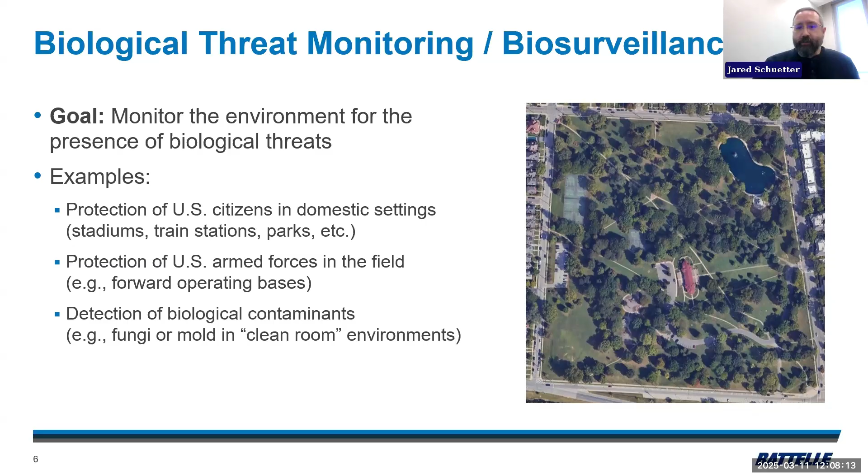And so, you may want to be putting some devices in a clean room to monitor to make sure there aren't any mold spores or fungal spores floating around, or in a water supply, say. So just using this park as an example, the idea is you're going to place some sensing devices of some sort throughout that environment. And, ideally, these would be passive sensors.

So any kind of particles floating around the air, when they come into contact with one of these devices, the device will in some way try to detect and maybe identify what that particle is. And then by tracking that information over time, or by using the results of an identification algorithm, you can figure out whether there are any anomalies. Is there a biological material in that environment that shouldn't be there, or are the levels of biological particles going higher or lower than you would expect, which might be indicative of some kind of an event?

And so if something is detected, then you would send an alert to some kind of end users, maybe first responders, or some kind of dispatch, to try to get somebody to look at the situation. So, in this picture on the right, maybe there's some kind of plume of biological material here. Hopefully you can see my mouse. Some kind of plume of biological material that's emitted from around the center here and flowing to the southwest. And maybe two of these sensors detect particles that are anomalous, that are associated with that plume. This would be an alert that would be sent to someone to say, hey, there's something happening here.

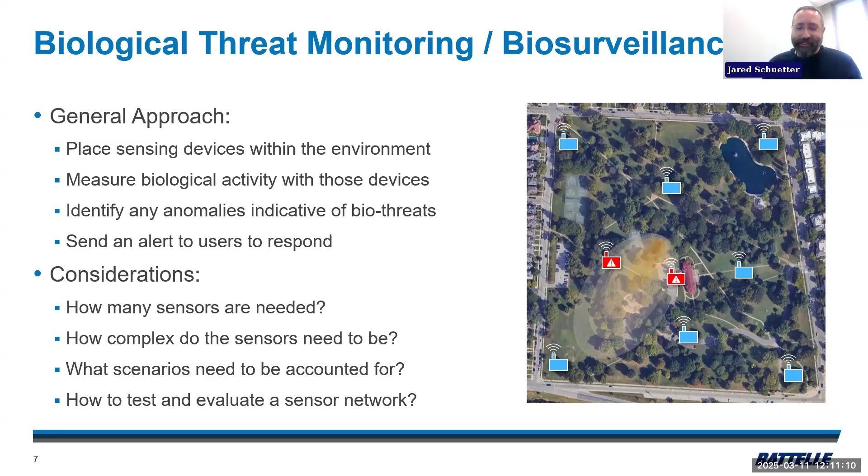Okay, so the area Battelle's been doing a lot of research in for a decade and a half at this point is in the design. Well, in part, what we do is we've tried to build our own sensor solution for these types of problems, and that's the REBS, which is here under Raman spectroscopy. There you go. But there are some other options out there.

So just to give you a quick overview of the sorts of sensors that people have developed, a lot of the sensors that are used in this field are the light-induced fluorescence sensors on the left. These tend to be really low-cost sensors, so you can put a lot of them out in the environment. They're lightweight and easy to use. The drawback to these types of instruments is that typically they're just detection based. So they're just looking at the fluorescence of these particles in different bands of light to try to identify whether they're biological, and then counting them.

And so all you'll get from these devices is you'll be able to see whether there's an increase in the volume of biological particles, the concentration of those particles over time. But you're not necessarily going to be able to identify what those particles are. And you can imagine in springtime, you're going to see an influx of biological particles just because you're going to have pollens and other things being released from all the plants that are growing. And if you're not accounting for that, you could have a lot of false alarms from systems like these. But anyway, those are used a lot.

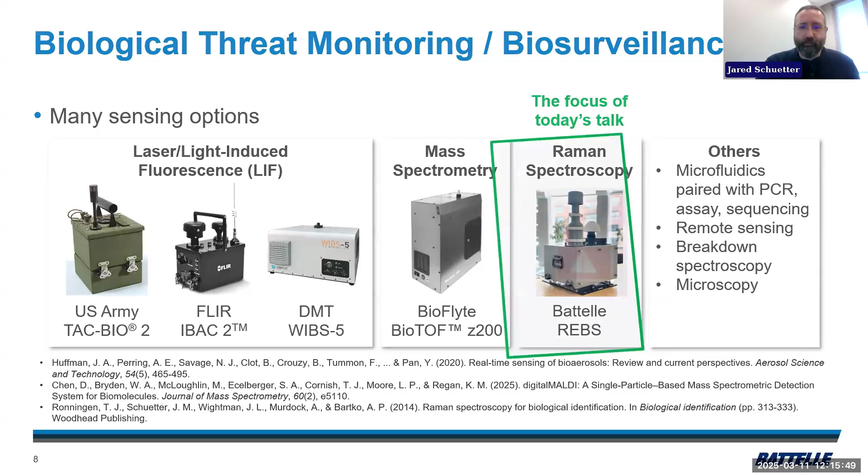And then the third piece of Battelle is we actually do laboratory management of 9 of the national labs around the country. And so that's another big piece of the business that's separate from contract research. And this particular talk about airborne biological detection, that's all primarily been done in this national security space.

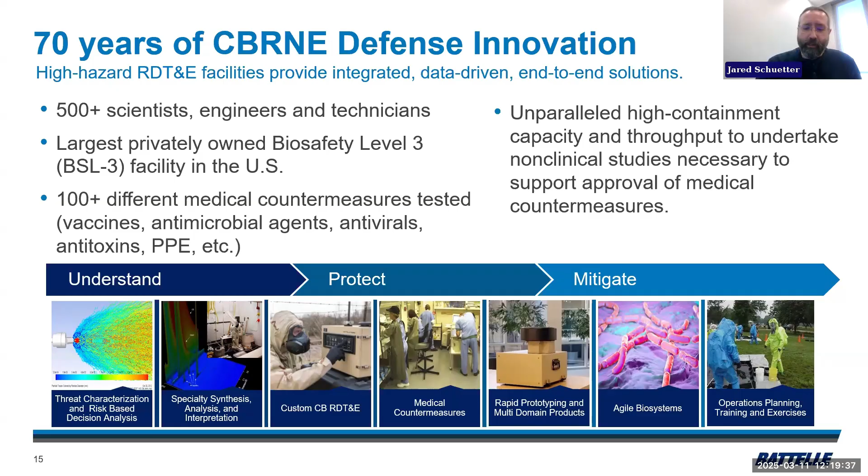Okay, and then just a quick note on the test and evaluation, because I think it might be relevant later. This picture on the left, actually, that is a REBS down here in this, it's called an HVADS chamber, but we kind of have different scales of testing that we can do for devices. So these small chambers on the left, you would introduce a material here on the top and it flows through this tube or whatever, this rectangular kind of container here.

And the material gets sampled through this intake down into the device where we try to detect and identify what it is. But then we also have room scale kind of chamber testing that we can do where you can release a material into an entire chamber and have multiple devices try to detect it. We've got kind of large scale facilities for handling live agents, especially those BSL-3 agents I was talking about.

And then we even have some large scale outdoor facilities where you can kind of have a more naturally occurring outdoor environment and blow some kind of material down a tunnel and see if devices can detect it. Of course, you're limited in what kind of danger, like you can't send too dangerous stuff through those facilities, but that's also a useful tool that we have.

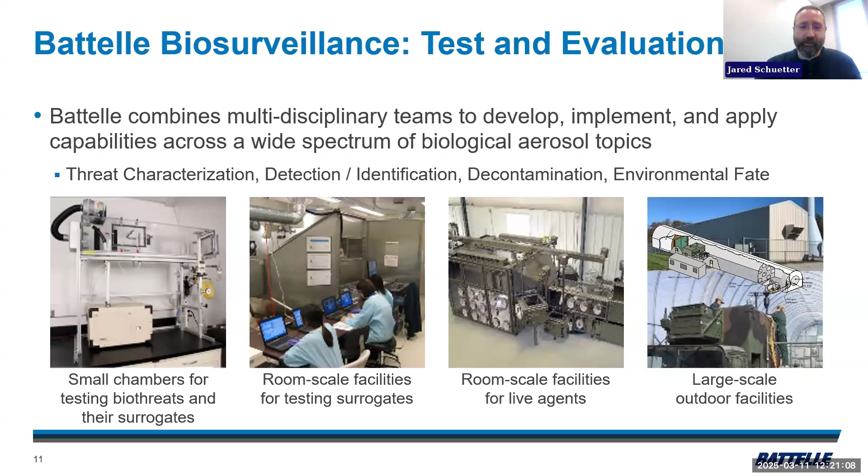All right, so just some quick overview of the REBS, which is the thing producing all the data I'm going to be talking about. So we started developing REBS back in 2006, and this kind of just shows the evolution of where we've been moving. I'm not going to go through all these, but in general, the trend is that the early models we just kind of built to try to get this whole process working. At the time, people had done Raman spectroscopy in a lab to characterize materials, but hadn't really tried it in this context. So a lot of the early iterations were just trying to get it to collect good data and allow us to build the algorithms to try to detect and identify these things.

And then as we started trying to mature the product and harden it for different applications, primarily for more military or national security focused applications, a lot of the requirements of the field started to creep in. So it was like, okay, if we're going to actually use this thing at a forward operating base, say, we need this device to be light enough that two people can carry it. And it needs to be ruggedized so that if they drop it on the ground by accident, it's not going to break. It needs to operate in high heat or extreme cold. It can't have dust getting in and gumming everything up.

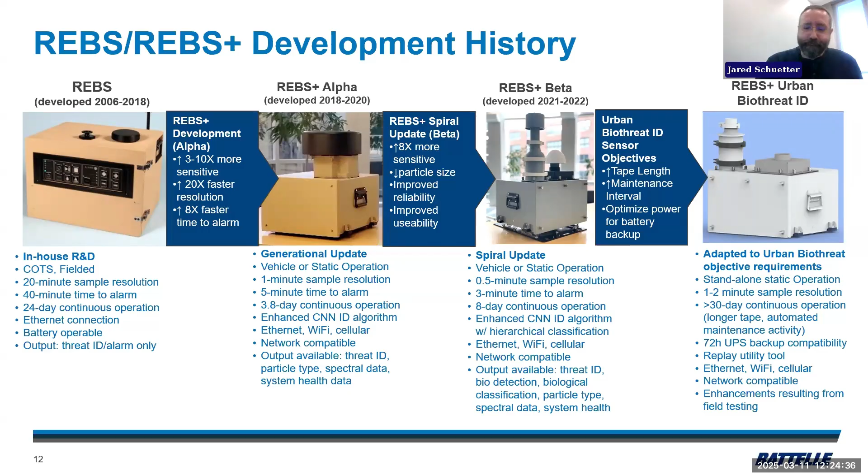Okay, so that's like my brain dump about everything to do with the field, and so hopefully I still haven't lost you. Big picture is we're trying to detect biological particles in the air. We're trying to identify what they are, and we built a device to do that. That's the Cliff's Notes.

So now I'm going to talk to you a little bit about the data that we produce on this device and how we used to analyze it. It's matured a little bit since then, but I'll share what I can here. Okay, so my background is statistics, not physics or biology, so I'll do my best though to explain how this stuff works. So if you're not familiar with Raman spectroscopy, basically you have some kind of molecule.

I'm showing here polystyrene, which is not biological, but it's just an organic kind of polymer molecule. We actually use this to test the REBS to make sure it's working. We just throw some polystyrene beads in it basically and see if we detect it.

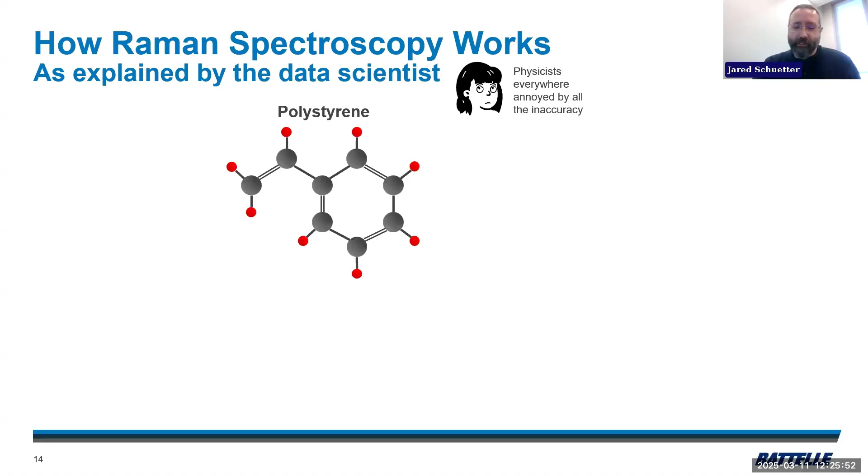So the idea is you're going to shoot a laser, it's going to hit the particle, and depending on the different chemical bonds and things that are in the particle, there's going to be some scattering of that laser. So the laser is at a specific wavelength of light, and when it scatters off this particle, you're going to get some scattering at shorter wavelengths than the laser light, and then you're going to have some scattered light at longer wavelengths. And so we're interested in the longer wavelengths here.

And so the idea is you're going to look at all the different photons at these different longer wavelengths and sort of bin them by the wavelength. And then if you plot them here, this wave number, which is the horizontal axis, is essentially the shift in the wavelength from the original laser wavelength. So some of these shifts will be at larger wavelengths than others, but by counting all the photons that you get at each of those different shifts, you'll get this spectrum.

And so from a single laser hit of the particle, you get this entire vector of data, basically. And these intensities are going to be counts. In general, you're collecting photon hits on a CCD array. So they're going to be like pixels along the array, and that's going to bin the photon counts into different ranges of these wavelength shifts. So that's how Raman works.

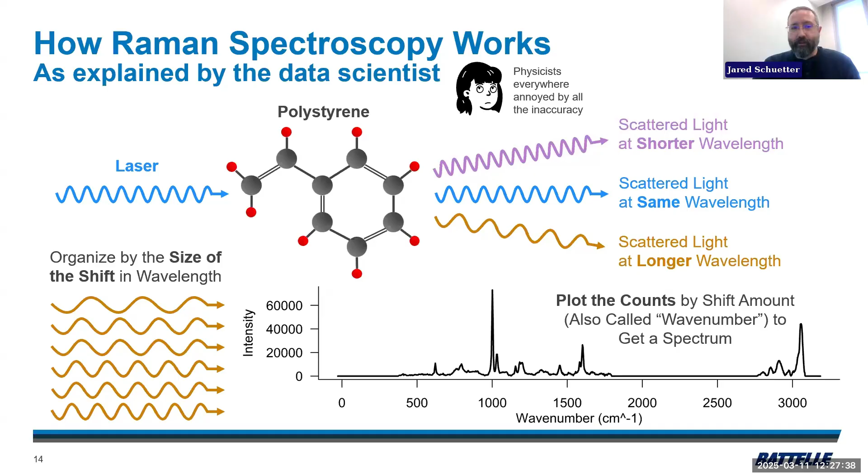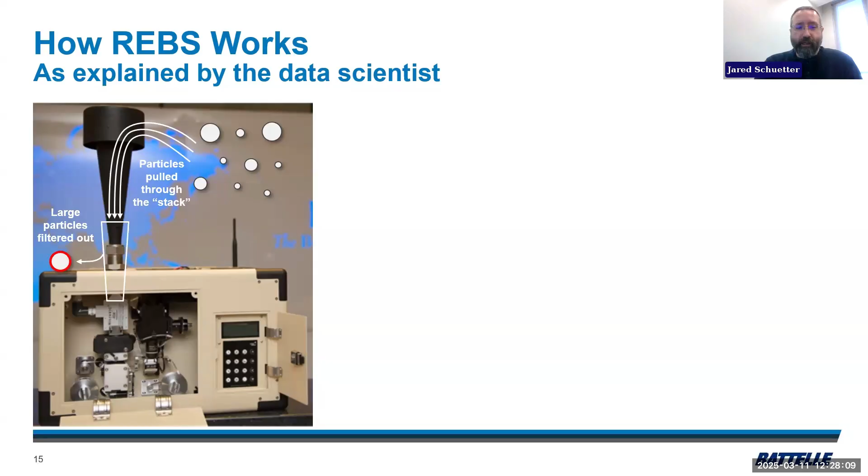And so with the REBS, basically most of the machinery is just getting the particles underneath a laser so that you can shoot them with the laser and measure the spectrum. That's the idea. And so the first thing is we've got this kind of smokestack thing on the top of the REBS. It's going to pull particles in from the environment and send them down a tube here. Anything that's outside of the range of respirable particles.

So most of the stuff we're interested in is 2 microns or 2 micrometers in diameter. Those are like the sizes of cells of a lot of biological organisms or like spores and things. Anything that's too large gets filtered out through a filter that we have in place. And so everything that comes through is going to be pretty small.

We basically apply a static charge to them, and that makes them stick to a tape. And so down here you can see 2 spools on the left and right. And there's a metal tape that goes up and through this instrument. It's kind of like an old school cassette tape. And so these particles will stick to that tape. It's an aluminum coated mylar tape. And so they stick to that with a static charge.

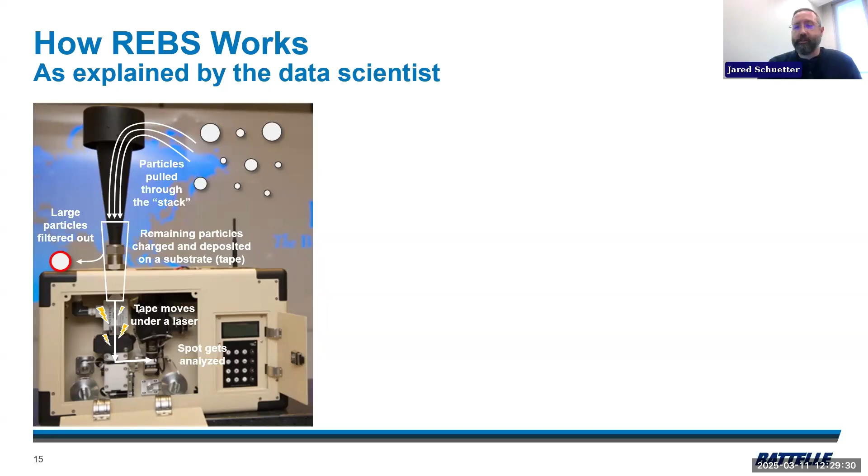And then what we do is we scroll the tape to move it from here over underneath this laser. This whole thing is the optical system on the right. And so that's where we shoot the laser and hit the particle. We also collect all the scattered light in the CCD array, which is in a spectrometer. And that gives us a spectrum. Well, kind of. It gives us the data that will eventually be turned into a spectrum.

So first, just to give you a sense of what's happening, this is what a spot looks like on the tape. So after those particles get the charge and they get deposited on the tape, this is a picture that we took at one time under a microscope of what that looks like. So you can see the different particles that are stuck on here.

And then this optical unit here has these components to it. So there's the laser, a spectrometer, and a camera. The way that we were doing analysis at this time is we're hopping this laser across the spot. So you would start the laser at some spot over here on the left side, and then we do these little jumps, and we see, does the laser hit any of these particles?

So these vertical rectangles, you can think of this as the laser. If we hit a particle, then we're going to get a spectrum from it. If we don't hit a particle, then we're not going to get anything from it. And we're jumping different distances depending on whether we hit a particle or not. That's why these aren't uniform jumps.

But if we do have a case where we're hitting a particle, then what you'll see in the image from the CCD array is something like this. The rows of this image from the CCD array, that's the vertical dimension along this laser line. In this case, you can see that the particle is about 1/3 of the way down the length of the laser line, and that corresponds to this yellow row here. Along the horizontal, that's the wave number. If you remember that polystyrene spectrum I showed a slide or two ago, it's the x-axis from that.

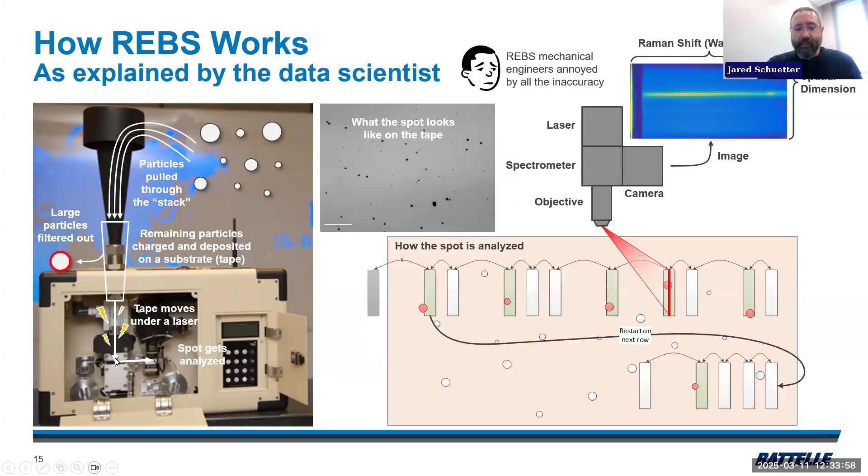Okay, really quick about how this algorithm works. If I go back to this picture of the device, you'll see that as we analyze one spot under this laser, we can actually be collecting another spot at the same time. So we do these things in tandem. We'll collect the first spot on the left of that image, then we'll scroll that underneath the laser and we'll analyze that first spot while we collect the second spot. And then we can shift and do the second spot while we collect the third and so on.

If it looks like something's there, then we do a longer exposure for 10 seconds and get what's called a bleaching image. It's called bleaching because some particles can fluoresce at the beginning as you heat them up with the laser.

So typically you might hit them with the laser a little bit before you actually start collecting a spectrum from them, just to let that fluorescence kind of die down. So that's what this bleaching image is about. And if it still looks like a particle's there, then we collect maybe 4 replicate images at about 20 seconds. So that's going to be a little over a minute 20 seconds to collect those 4 replicate images. And those are what we use to make the spectrum, which I'll show on the next slide.

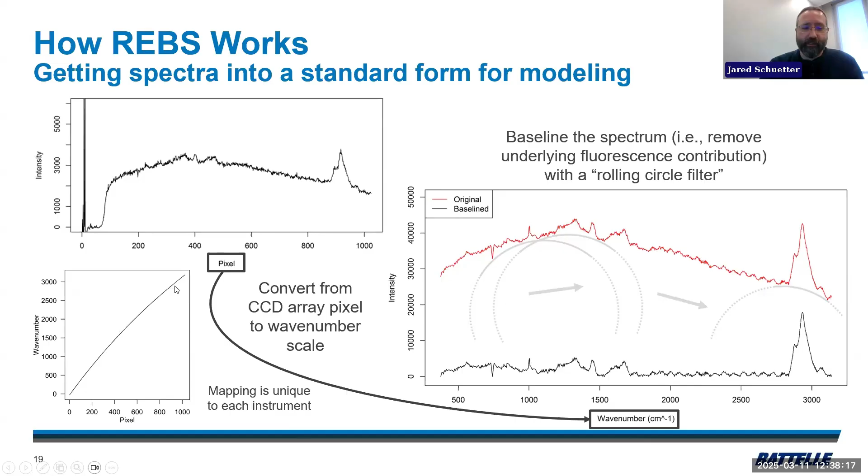We also have a mapping from the pixel number on the CCD array to the wave number scale, which is actually a non-linear mapping. There is a curve here, I guess. This isn't a straight line between pixel and wave number, but that's a minor point. And then there's some other stuff we got to do to clean up. So it's a minor detail, but each instrument actually has its own mapping from pixels to wave numbers. It's specific to that CCD array that's in that instrument. So to get all these spectra measured on the exact same wave number grid, we use this cubic spline interpolation.

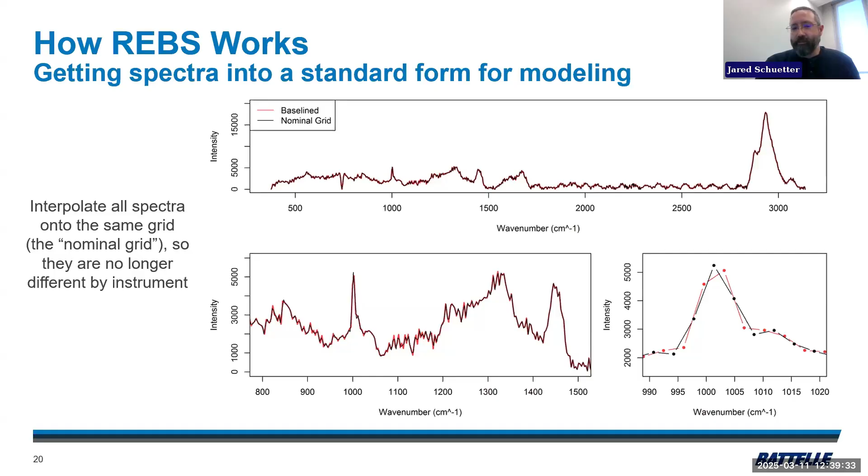So basically we're just trying to remove all of the things that are specific to the instrument or to the collection conditions that led to that fluorescence trend. Trying to get all the spectra on the same scale and on the same grid, so that we can analyze them across instruments.

Garrett, is it possible to get multiple particle types in the same image, like in separate groups of rows? Yes. And how do you deal with that? Yeah, actually we have an algorithm now that tries to go through and do some initial classification. There are some different kinds of things that can happen in these images, which I didn't really go into detail here, but for example, sometimes you burn the particle with the laser, and so what you'll see is a spectrum that actually is associated with soot. And in that case you can't really recover information about the particle from that. So we try to detect cases when that's happened and kick them out of the analysis process.

There are cases when you have lots of fluorescence and you can't really resolve these peaks in the spectrum that you see.

So then we kick that out of the analysis as well, but track it to be able to report back to the user if we're seeing unusual levels of fluorescence. And if you have multiple particles with signal in the same image, we have

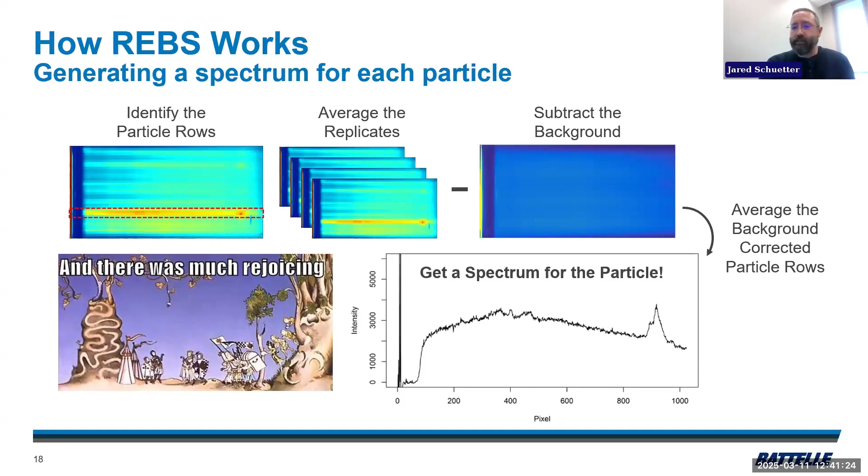an algorithm that, you can imagine if you look at one of these images, right? If you looked along the vertical axis here in a particular column of this array, if you had two particles right next to each other, you should see two Gaussian humps or something across those rows looking down vertically associated with each of the particles. So we have an algorithm to try to split particles apart that might be neighboring like that.

And in some cases they're right up next to each other, or particles can clump as well. So you can get some aggregate particles that are just really big. And we try to deal with that. We record the size of each particle and try to account for that in the identification if needed. So I hope that helps.

Okay. So moving on, because I'm probably taking too long to talk through all this.

The final steps are to take those spectra that are on the same wave number grid now, and we want to remove additional information that is irrelevant. Most of what actually tells you what organism a particle comes from is contained in these smaller, narrower peaks in the spectrum. These broader features are not as important.

So we run a filter over the spectrum that simultaneously smooths it, but also calculates a numerical estimate of the second derivative. This filter is called a Savitzky-Golay filter. What it does is it basically converts each of these narrower peaks into a V shape. If you think about your second derivative, it's going to be positive on the left and the right of this peak, but then negative where the peak turns over. So it'll create this V shape where you have these peaks.

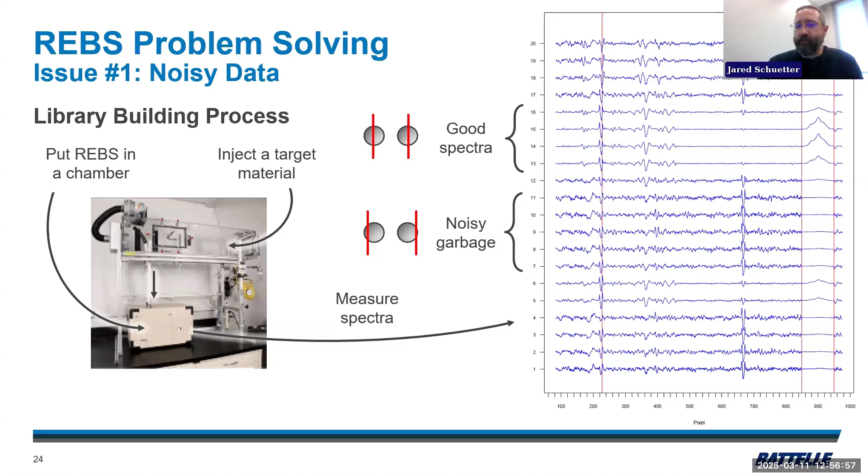Okay, so a lot of our early questions were just about dealing with this noise, right? Like you're going to use this device in a real world setting, and you're going to see things where the laser hits the edge of the particle and not just hits the center. So we had a lot of questions about what do we throw in the training set? Do we want to include all of the data that we get for an organism and be representative of what's happening in the real world? Or is too much noisy data going to confuse the model?

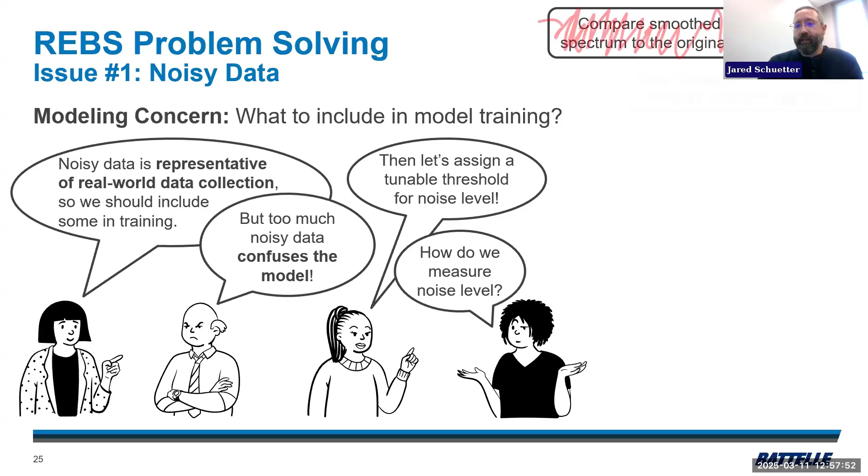And so we decided, okay, we'll assign some kind of a noise threshold and put everything that's above that threshold into the training set. And then the question is, well, how do you measure how noisy something is? So we tried a lot of different things. When I originally joined, we were smoothing the spectrum and comparing that to the original, but that only measures the noise. You also have to consider how much signal you get. It's like a signal to noise ratio that kind of matters here.

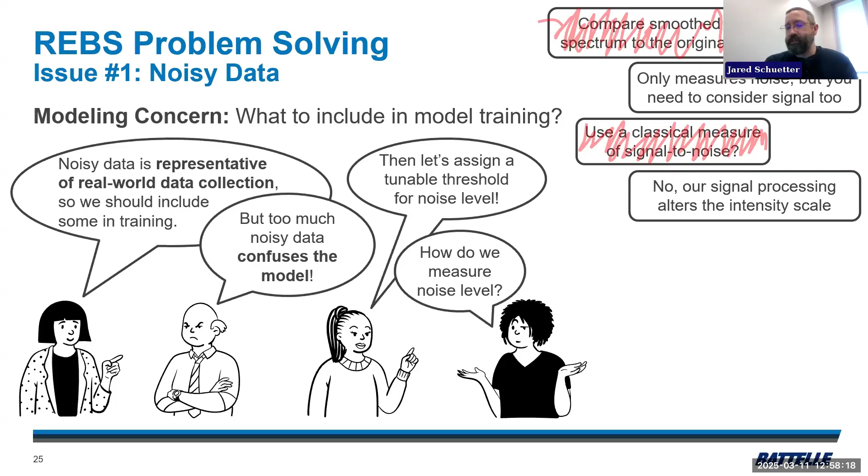And so then there are a lot of classical measures in spectroscopy for measuring signal to noise, but because of all of this background removal and the rolling circle filter thing that we do, this intensity scale loses all meaning by the time we get to the end. So those classical measures ended up not working for us either.

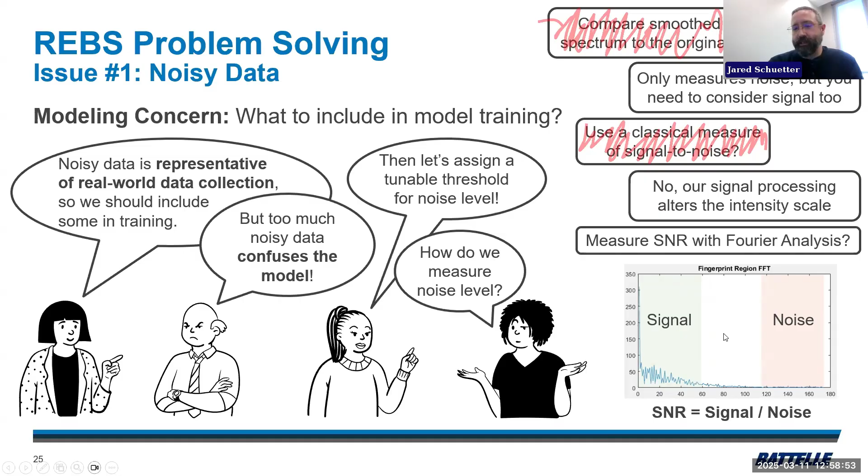And finally, we've kind of settled on a Fourier analysis approach. So we're looking in Fourier space. The signal is all captured in these lower frequency components on the left, and then the noise is all this higher frequency kind of signal on the right. And so by defining these ranges and taking the ratio of the power in each of these ranges, you can get a signal to noise ratio, which has worked pretty well for us.

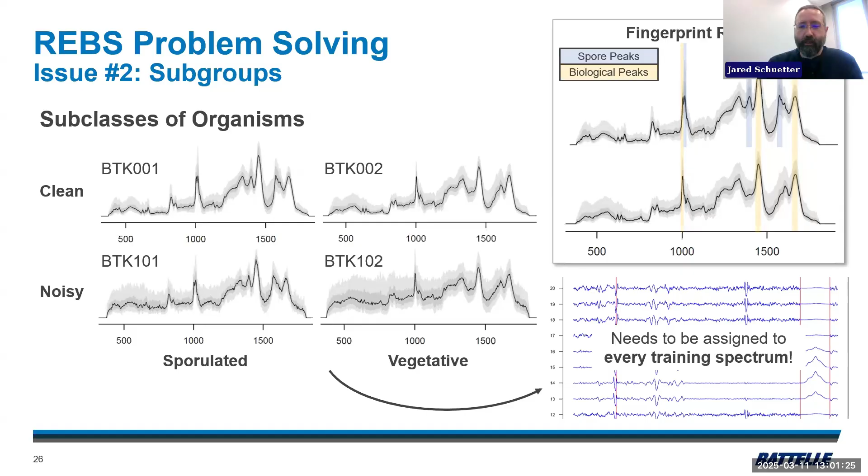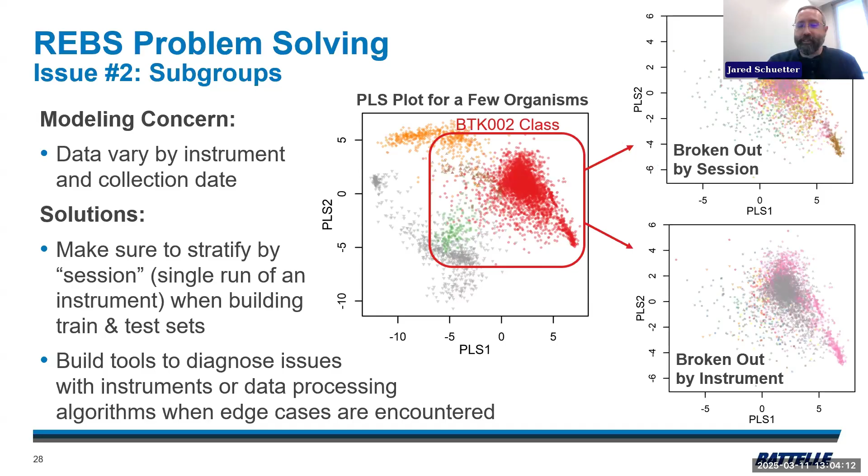Another thing that makes the problem harder is there are definitely instrument level features that creep into the spectrum, and there are also features associated with other environmental factors, maybe the humidity, the temperature, the time of day. It's challenging when you're building a system for the field to account for all these sources of variability and to even measure them. But definitely we observe them.

So just as an example, this is a partial least squares plot in 2 dimensions, just to show you the data. This red cloud is Bacillus thuringiensis kurstaki, or BTK for short. These are a bunch of spectra we collected on that organism. And if you take this red cloud and recolor it by session, a session is a single run of the instrument. So when we disseminate BTK in this case, and we run the machine through one cycle of collecting a spot and then jumping across that spot and collecting all the different particles in that spot, that would be a session.

So, sorry. When I break that out by session, you can see that some of the sessions, like this brown one here, clump up in this space. And also, if we collect on multiple instruments, you can see that the instruments break out into clusters too. So there are definitely sources of variability associated with the session, which is the environmental condition, and the instrument, that you can see through dimension reduction techniques like this. So a lot of times we've made plots like these in a diagnostic setting to identify potential issues or other things we need to track and include in models to mitigate their effects.

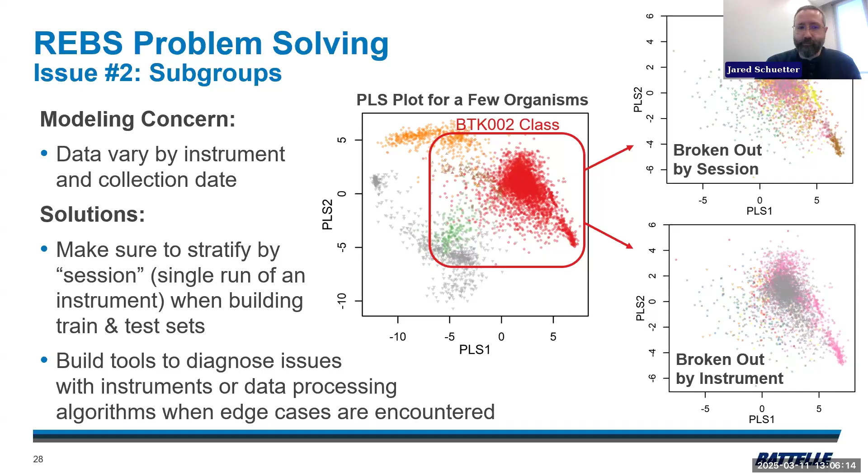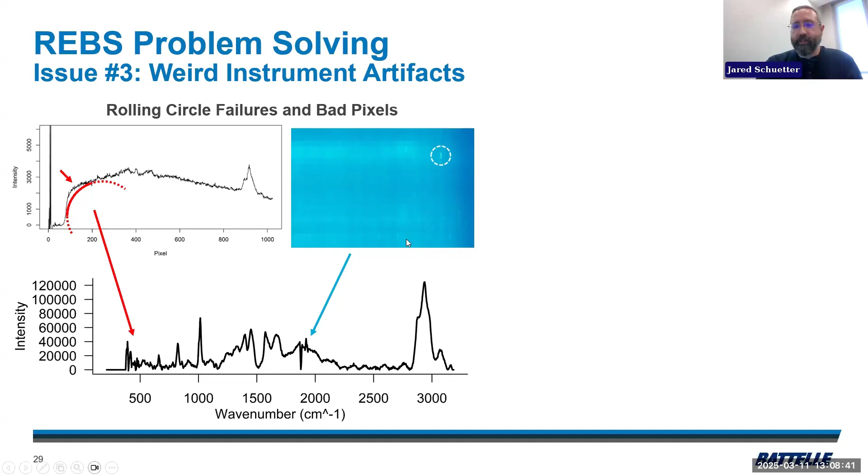But then also when you do this rolling circle and you hit a big dip in your spectrum, that circle can't fit onto either side of the dip, and it ends up pushing everything up in the spectrum. So you can see this kind of general trend here. That's just from the rolling circle pushing the spectrum up because it couldn't fit up into here because of this dip. And it creates a kind of volcano shape. So things like that happen, and we learned to detect those and try to mitigate them as much as we can.

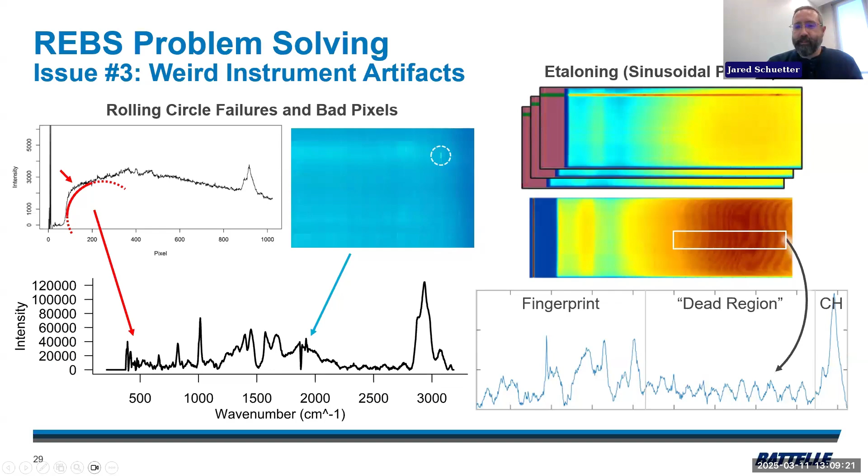Other things happen like this etaloning pattern, it's called. It's a thing that happens with CCD arrays where you get sort of a wavy pattern in the image, and the wavy pattern is not necessarily consistent across time. So when we've seen this kind of thing, especially when we have low signal in the data, it creates this sinusoid pattern, which is an issue. So we've had to try different things to mitigate the effects of this too. But these are the fun things that happen when you're dealing with real data as well.

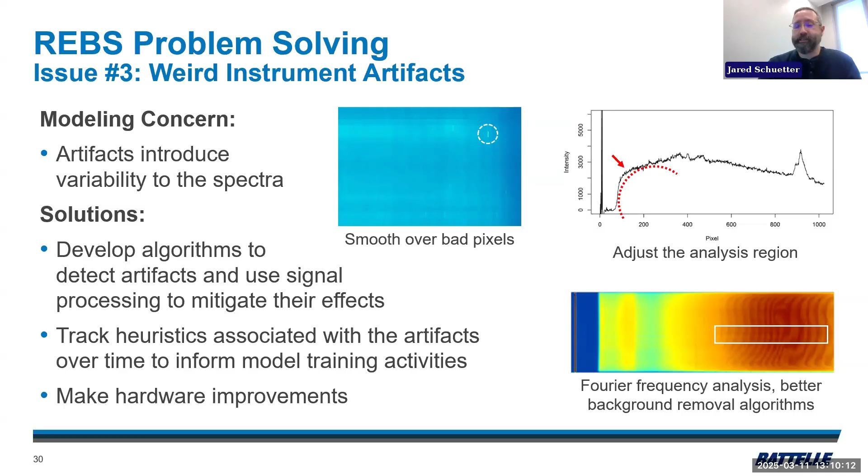And then just a quick note on how we tried to identify or mitigate these things. With these bad pixels or the different sensitive pixels, we detect them and we smooth over them, which has helped, especially in the background. Adjusting the analysis region for this, like I talked about. And then the background removal helps a little bit with this etaloning. We've also done some stuff in Fourier space to try to detect it and remove it. Don't have a lot more detail there to share. And then with all these things, better hardware does help over time. The impacts have been reduced over time because the hardware has gotten better.

Yeah, I'm almost done here. Just a few more slides.

So one big thing on the algorithm side that we've continually struggled with, and I think most people who do classification struggle with this as well, is that our classifier is trained on a set of known organisms. So organisms we decided are important things to detect with the REBS. We went through the process of disseminating them, collecting the spectra, and building a training class for that organism. And that forms our spectral library, the library of spectra and the labels that go with them for these organisms we picked.

And so similarly with our classifier, when we've got this specific universe of organisms we're looking at, and we get something from a new organism come in, it's going to predict it as one of those organisms, or maybe it's going to give you a prediction that spreads the probability out across lots of groups, which is what you would hope would happen. But in practice, it doesn't always happen that way. So sometimes we'll get a high confidence hit on the wrong organism. So one big area of research for us has been how do you detect when this happens so that you can avoid misclassifying a particle?